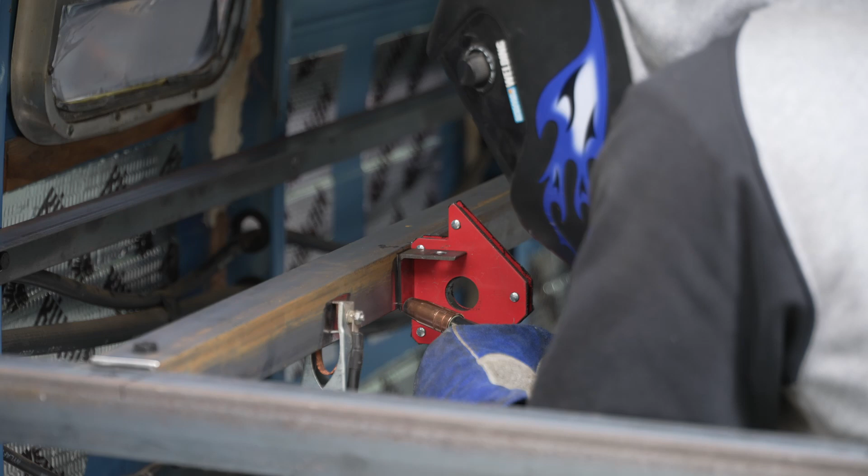In this video, we're building the framing for my camper van cabinets, and we're doing it out of steel.

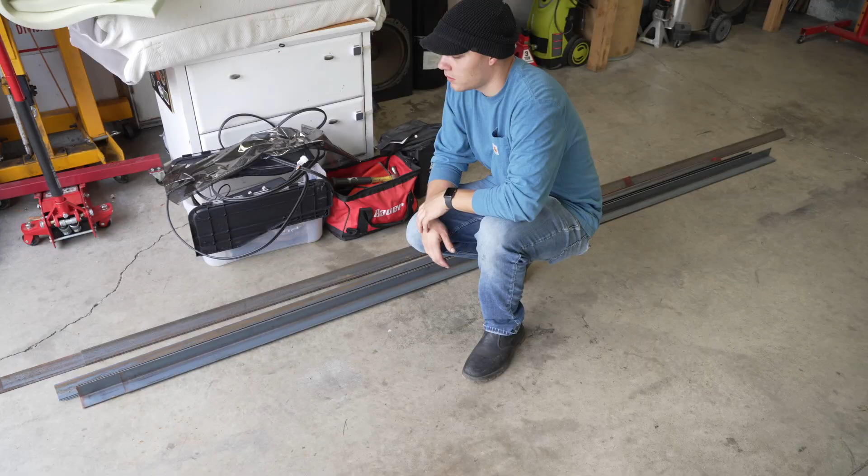Alright, got my steel. So you might be thinking that this is a lot of unnecessary weight, that making it out of steel would be really heavy. All this steel weighs about almost exactly 130 pounds, so that's like having a small adult passenger in the back of the van. I think you'd be surprised how fast plywood and 2x2s and 2x4s and everything adds up, so I'm able to use a lot less material to get a lot of strength. Overall, I think the weight would be comparable, but I have a suspicion it'll actually be a little bit lighter framing everything out of steel.

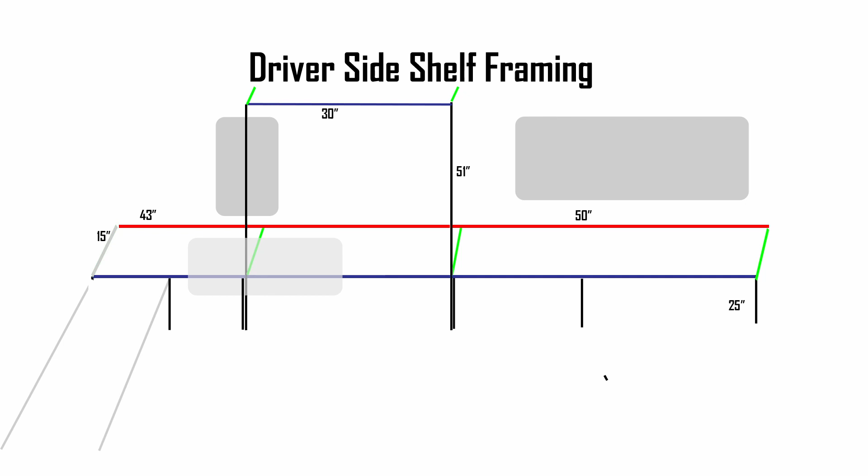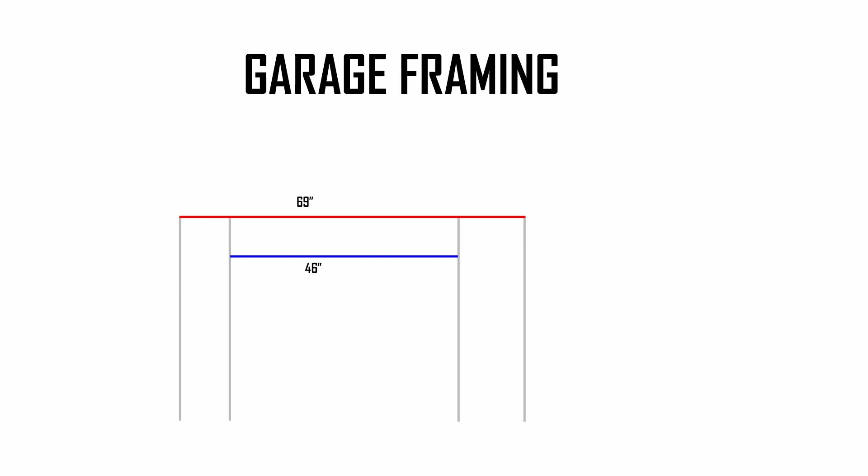This is my not super accurate blueprint, but it illustrates the ideas that I wanted. The driver's side will have one full-size cabinet, and the rest will be a countertop with storage underneath. The passenger side is going to be somewhat like a storage chest, with the countertop hinging up to give access to storage. I'm going to have a shelf stretch across the width of the van in the back, and underneath there will be garage storage for fluids, tools, and other supplies.

The one thing I want to do is double check that the cuts they made were accurate. I trust them and I've never had a problem getting steel from them before, but I had a couple of these cut to the exact lengths I would need in the van, just to make it more convenient for me. I just want to make sure it's close enough or accurate that I'll be able to use it for what I want.

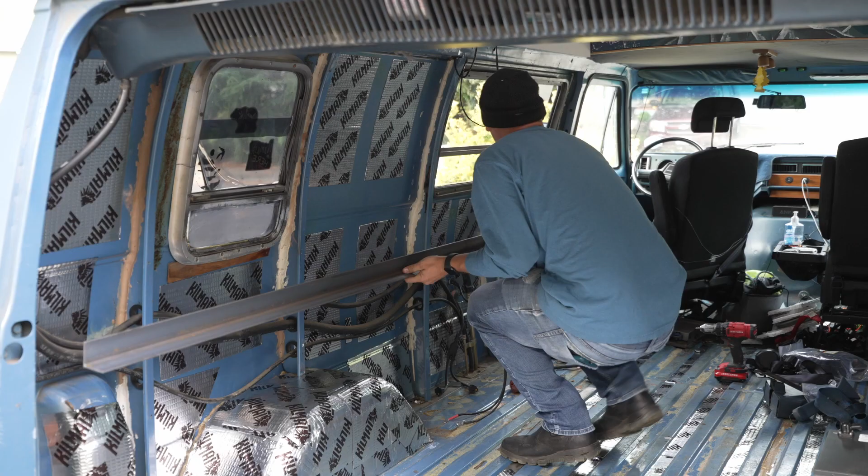So I'm going to have the height of the countertops, or at least the top of the framing, be about 25 inches, and then whatever the countertop material is, maybe an inch or a half inch thick, will be on top of that. Yes, that's pretty low, but the back windows in particular are pretty low, and I didn't want the countertops coming above the bottom line of the windows, so that's why I decided to stick with 25 inches.

So I'm marking at 24 inches for the spot to drill the holes for the rivnuts, because this is 2 inches wide, so 1 inch is dead center. The top surface is going to be at 25, come down 1 inch, and I'll be dead center of the angle iron, and that's where I can run a bolt through.

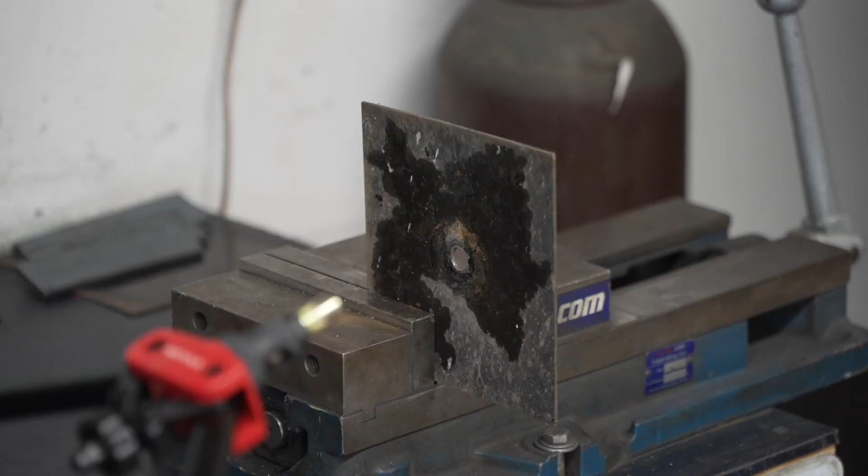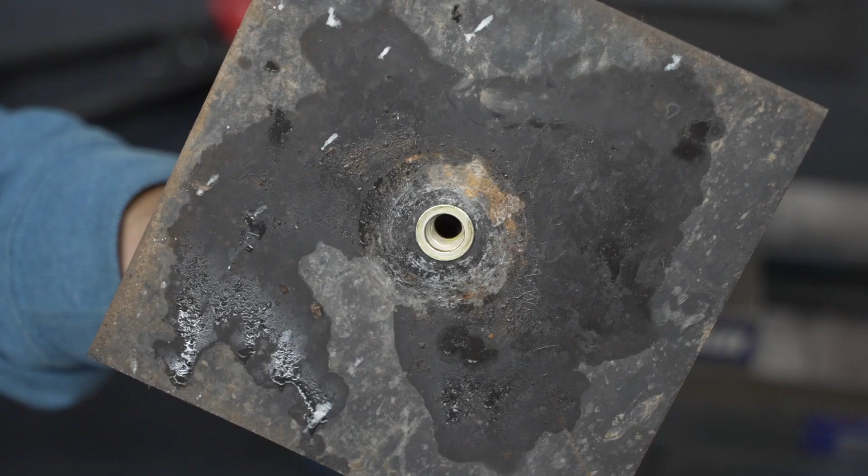The tool I'm going to be using to install the metal to the body of the van is called a rivnut tool, or a nutsert tool. Basically, it's a way to install a threaded insert onto sheet metal without having to put a nut on the back side. And now you can thread in a bolt. One more for good measure.

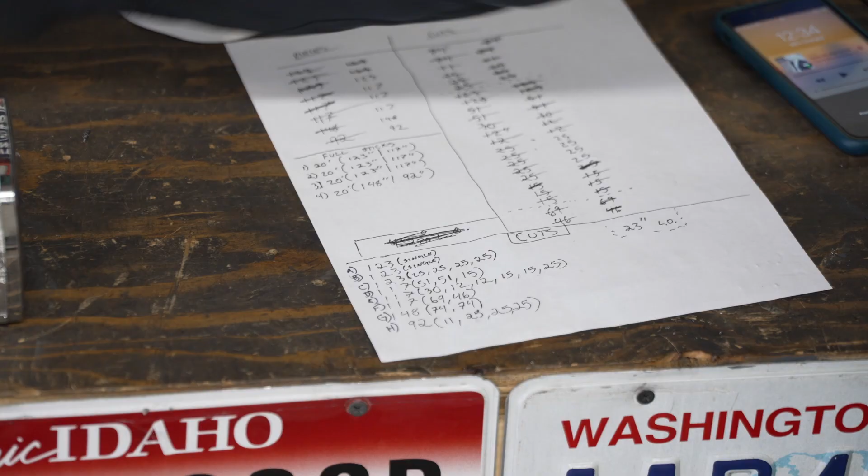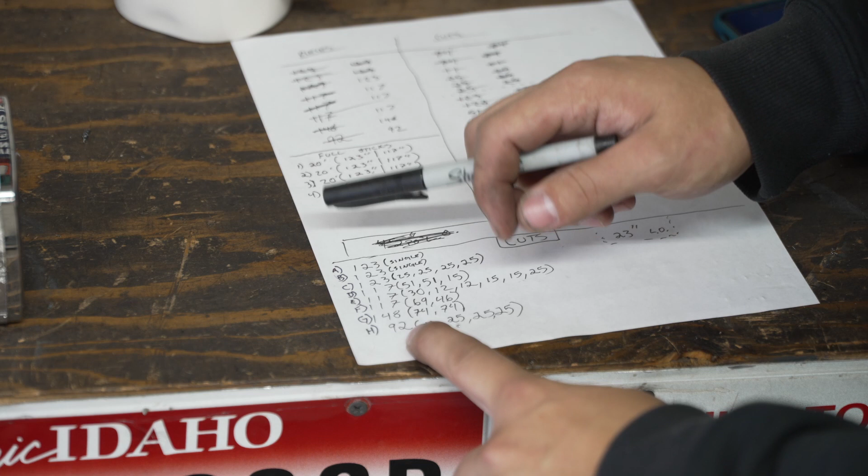Alright, so one thing I'm doing here is I've listed out each of these individual cuts, so I have all the pieces. I have 3 123 inch pieces, 3 117 inch pieces, a 148 inch piece, and a 92 inch piece. I'm going to go ahead and label those with letters and then stick them on the steel so I don't accidentally get it mixed up, and then as I'm cutting, try and keep everything in the same pile that I cut it with.

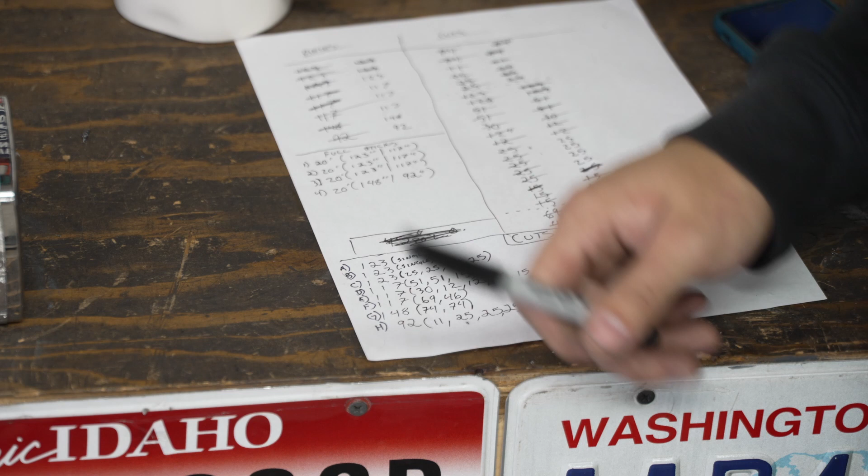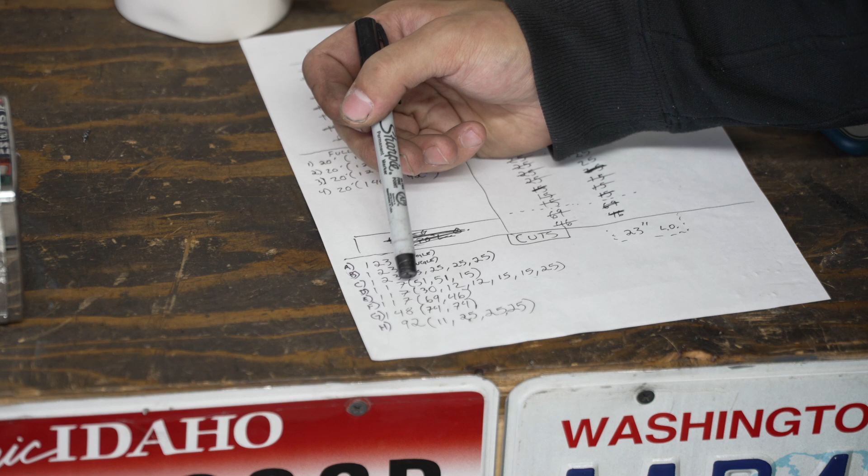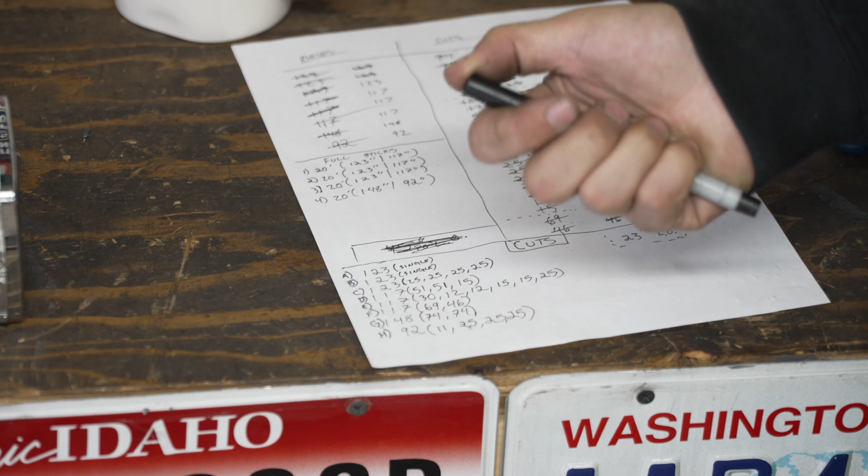So 2 of the 123 inch pieces are going to be uncut by themselves. 1 of the 123 inch pieces is getting cut into a 25, a 25, a 25, and a 25 inch piece. And the 117s are getting cut into a 51, a 51, and a 15 inch piece. So I just have everything specifically sorted out onto how many cuts I'm going to get. The idea is I'm going to be pretty precise with how much I'm going to have left over, as long as I don't screw up the thought process, but I think it'll be pretty good.

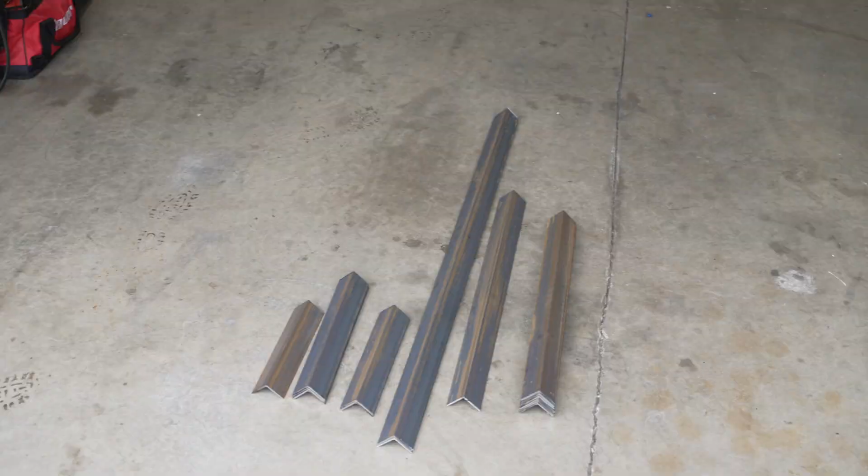So today I get to brush up on a little bit of welding. I haven't really welded since high school, and that was all arc welding. Did a couple practice runs on Nick's MIG welder, and I don't even want to show you, but I stuck metal together.

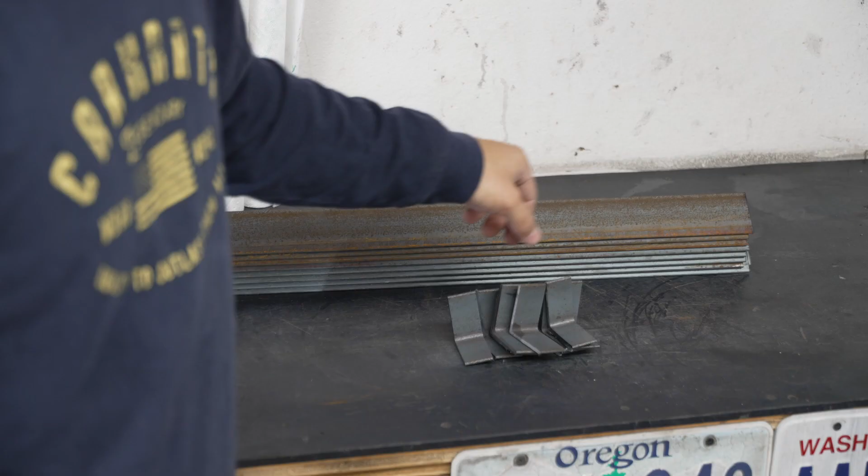So today I'm going to work on a simpler project. I'm just going to weld some little mounting tabs to the legs of my cabinet frames where I'm going to bolt through the floor. That should be a really simple thing for me to practice on, and all those welds are going to be hidden when I'm done, so if they're ugly, that's fine. So now I need to get these all prepped for welding, taking all these little burrs off and grinding the mill scale off of the steel so it can be welded without being all disgusting.

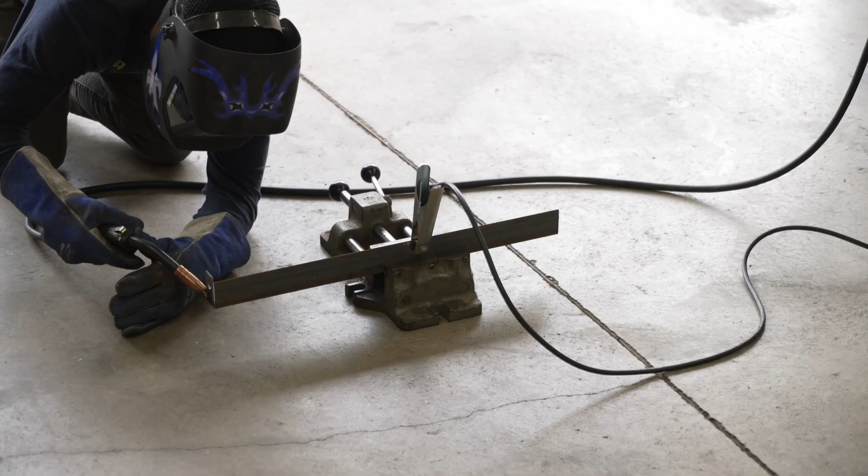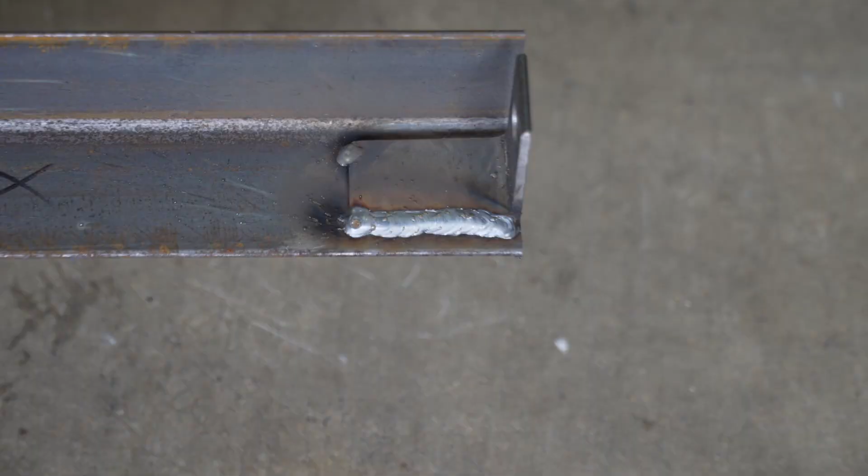I'm pretty pleased with that. It turned out a lot better than I thought it was going to, based on how I was going. I'm sure it's not perfect and could be better, but I think that might be the best weld I've done so far.

Alright, so this is pretty cool. Right now there's only 4 bolts holding all the metal in the van. There's a sidebar on each side, and this crossbar is bolted to those sidebars, not to the body of the van. So there's only 4 bolts on the body of the van right now, and I can lift myself up on just this back bar.

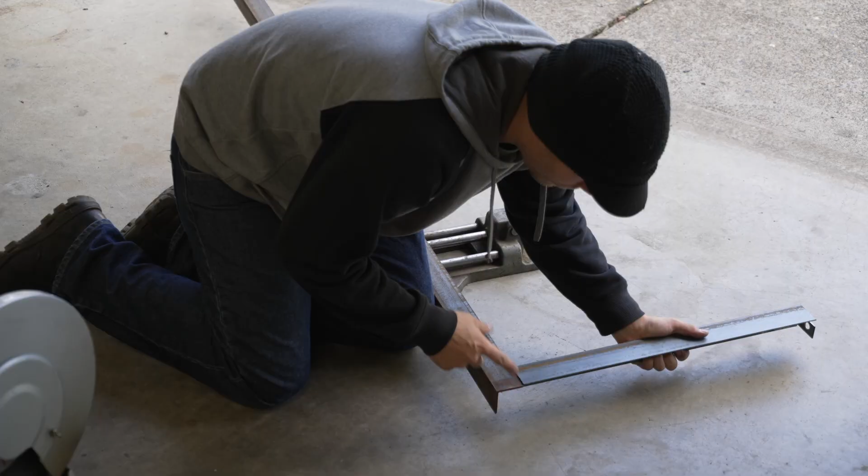So I think the theory of strength per pound of material is starting to show itself. I need to prep this and tack this leg in place, then run back to the steel place. Rather than capping this open end with another piece of angle iron, which I don't think will look very good, I'll get another piece of 2-inch flat bar from the steel shop and weld the cap that way, then grind the corners all smooth.

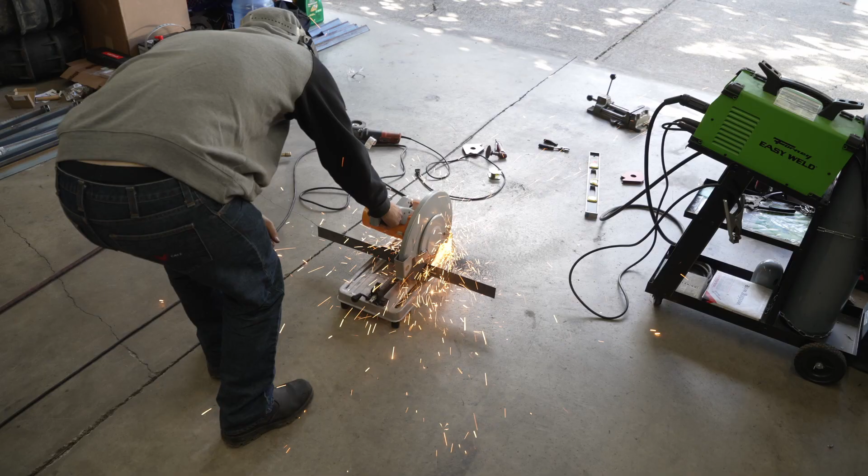So this little bit of flat bar is going to go here. I could try to round this edge off, make it sit flush in here, and probably have to shave down that little bit. But before I can tack this piece in place, I need to fully weld this leg.

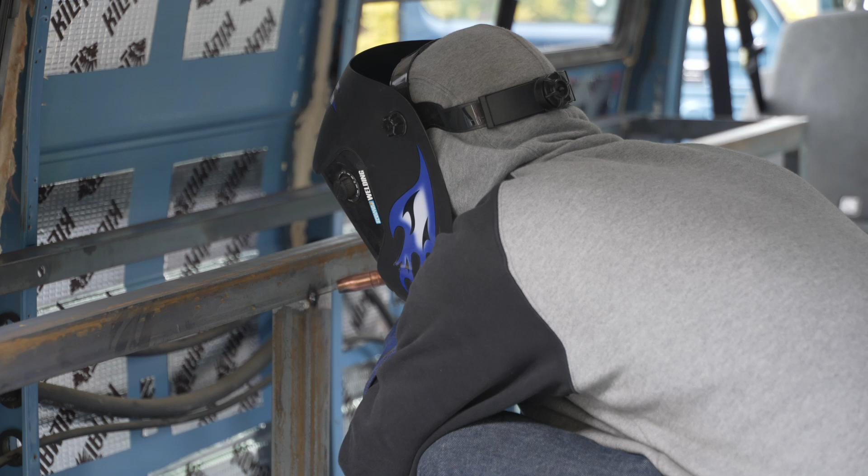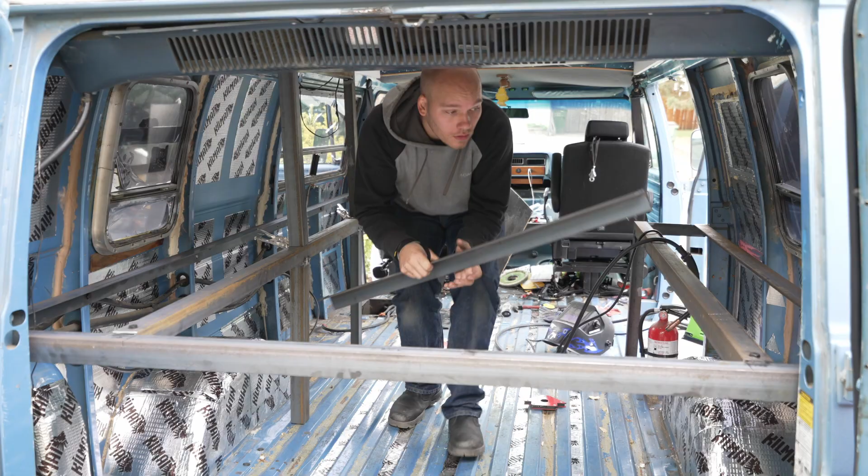I forgot I'm going to have to cut this a little bit, but anyway. Picture this bar not hanging over the edges—it's going to sit just inside these two pieces on a couple tabs like I have back here, and just kind of hang.

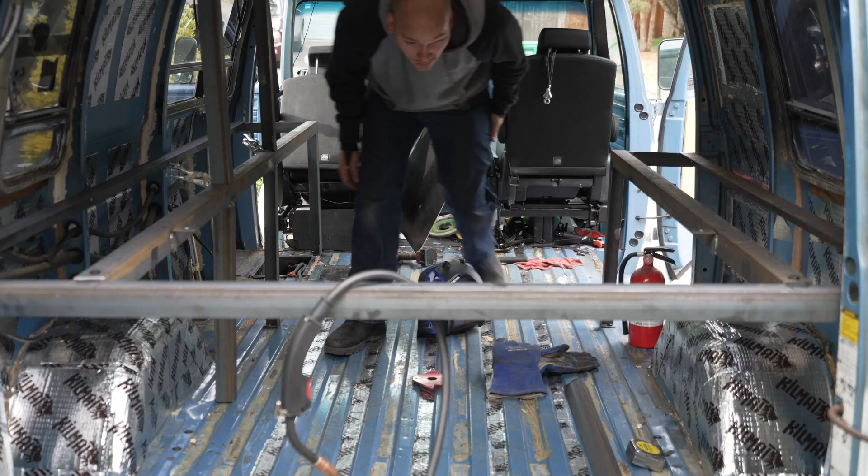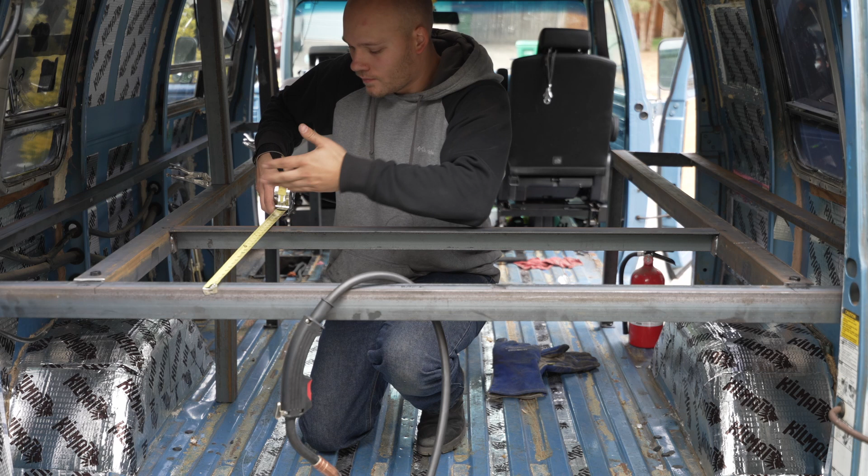Both tabs welded on. They're not pretty, but with this little bar, boom, now you can't see them. Doesn't matter. Alright, so that's the edge of my garage space, and unless I screwed up severely, it should be 20 inches. Perfect.

So the idea is I'm going to use this piece here to mock up the edge I need to cut, because this part of the van is curved inward. The right angle won't be a problem, but I want to shape this so it fits nicely along here. It's better to mess up a cut on cardboard than on steel, because it's easy to just get more cardboard.

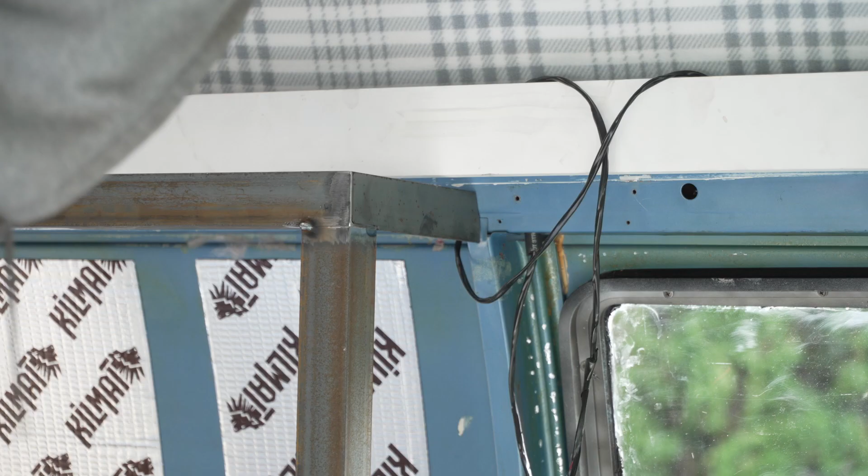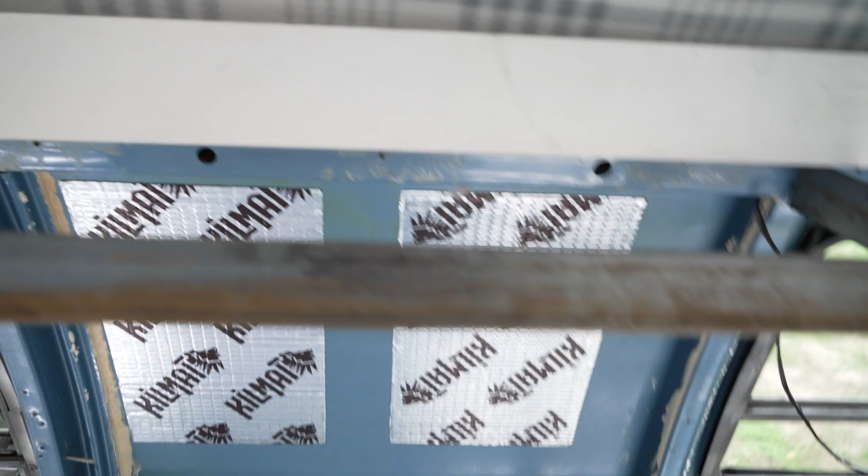Well, looks like I got it pretty much exactly how I want it. So off the inside of this flat bar, I'm going to do another L bracket so it can bolt to the body of the van there. Then I'm going to have another L bracket come off somewhere closer, but flat, so I can slot a shelf on top of this.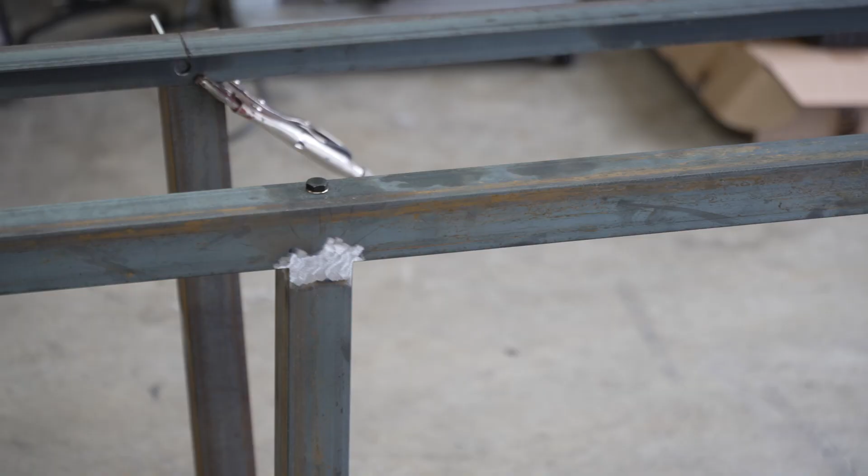Okay, so that's all the welds ground nice and smooth for, I guess you could say, a mostly seamless transition. Had to put the respirator on—there was so much dust flying around with the grinder, it was getting disgusting, so I probably should have been doing this from the start, but better late than never.

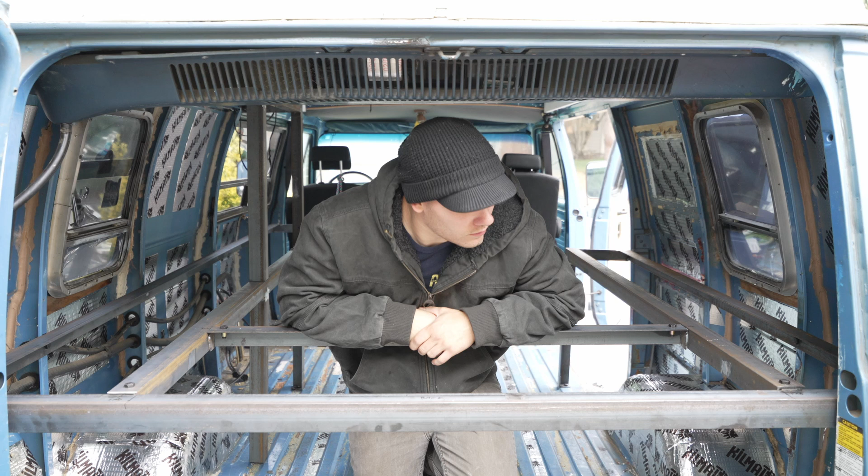Alright, so that's all the metal framing done. I'll calculate the total weight based on how much material I have left over on the garage floor, see how much weight this framing added, and put it down below. But I'm pretty pleased with it—it's sturdy and strong, and it's removable. As opposed to building this out of wood or 2x2s or something, with liquid nails and all kinds of ways of mostly permanently sticking it to the body, I have a stronger and removable cabinet system, and I'm pretty pleased with how it's turned out so far.

So the next project I'm going to do is the insulation in the van. I'm going to take this framing back out, work on insulating the walls, then come up with a plan for the actual face of the wall material, and then start putting the walls, countertops, and everything on my cabinets. I also have to do the electrical and the floor. So stick around for those projects if you want to see them, and I'll see you on the next one.